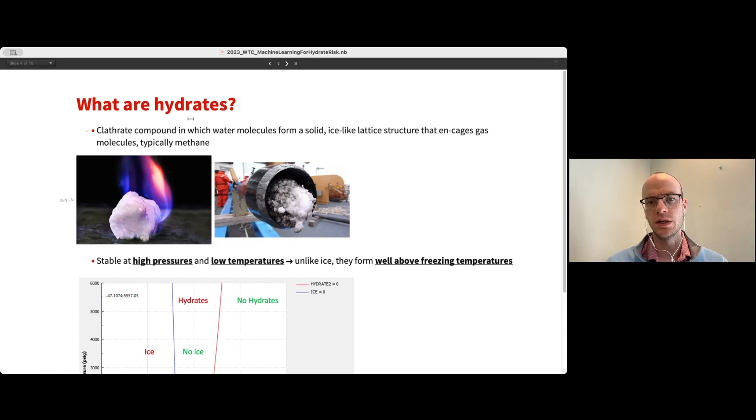I've got an example here on the right. You can form these hydrates in your pipeline, and if you have the right conditions and enough of the mass required, the water and the gas, those hydrates will continue to agglomerate together, and they'll basically lead to a blockage of the pipeline. In an isolated pipeline subsea, that's an incredibly problematic situation. I wanted to give this background about hydrates because it's going to feed into what we were doing on this particular project.

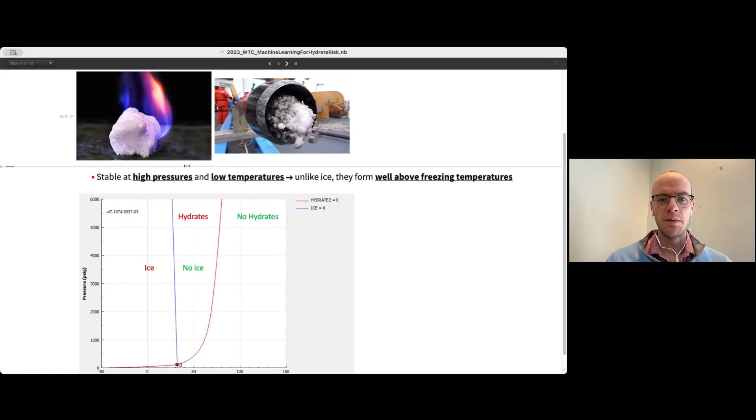So a little bit more about hydrates and why they're interesting. Obviously they look like ice, they feel like ice as you're looking at them. But you can see here, I've plotted a temperature versus pressure plot. The blue line here is actually ice.

So water ice forms at 32 degrees. As you increase the pressure, there's a small deviation where you can actually go a little bit lower before you start to form ice. So kind of to the left of this line is ice, to the right is no ice, right? Now, the hydrate curve is actually this red line here, right?

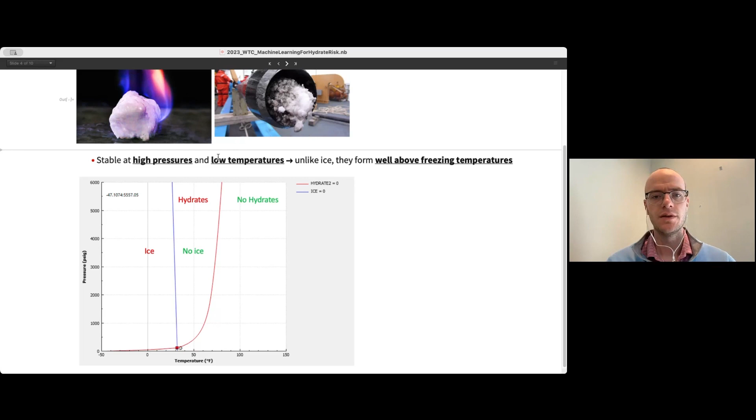And what you can see is that you can form a hydrate at temperatures well above freezing, and actually at temperatures that are relatively moderate, somewhere around 60 to 70 degrees if you have the pressure, right? So there's a strong pressure component, and that's what ultimately allows hydrates to form in situations that you wouldn't necessarily intuitively expect a hydrate to form if you thought about it like ice. So that's some background about hydrates.

What I wanted to focus on now is actually the project that we were involved in. So this was not an offshore project. It was actually an onshore LNG facility. And so LNG stands for liquefied natural gas. I'm sure most people have heard of this. You probably see it on the news occasionally, things like that.

It's essentially you're taking methane, right, which is a gas, and you're converting it into a liquid form so that you can transport it easier, right? So we've heard of exporting LNG. That is essentially where you're taking this methane, you're converting it into a liquid form, and then you're able to ship it on these large tankers around the world. And it's one of the most effective ways to transport gas.

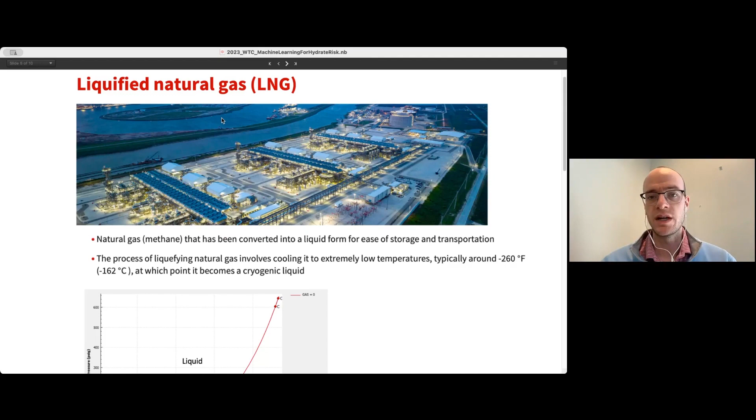The process of actually creating LNG is rather difficult, though. Methane by itself does not want to be a liquid, right? Really at any temperature that we're used to, right? So this again is that same plot I was showing earlier, temperature versus pressure, but this is the phase envelope for pure methane, right?

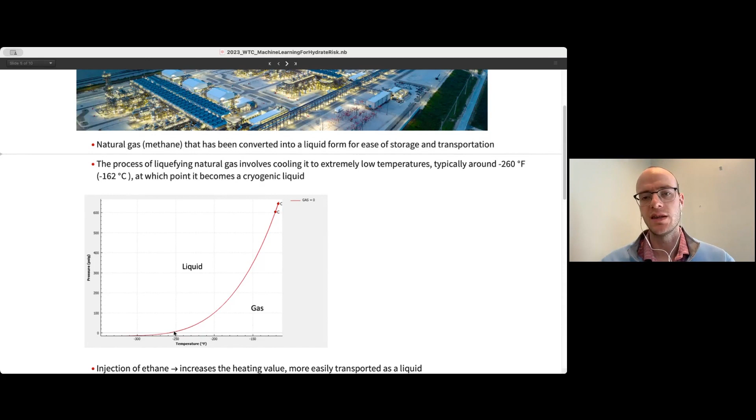So basically at temperatures above around minus 300 degrees Fahrenheit, that methane is going to want to exist as a gas. So the only way you can get it to a liquid is to actually cool it down to these temperatures. So you typically see LNG plants operating at around minus 260 degrees Fahrenheit. That's the only way that they can get that methane into a liquid form.

Now, one of the other things that occasionally these plants will do is they will also include an ethane stream in there, right? So methane is a single carbon molecule, so carbon and four hydrogens. Ethane is two carbons and six hydrogens. And so what you end up with when you do that is you can increase the heating value of that methane that you're shipping.

And all of the LNG prices are generally based on how much heating value you actually have. So if you have ethane available as a source, you can inject that into the methane, then do your cryogenic processes, and you actually increase the heating value of that LNG.

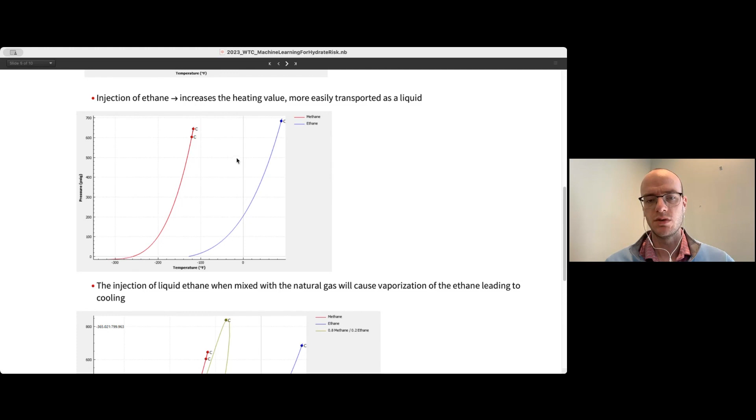So here I've got that same methane phase envelope, and here I've got the ethane phase envelope, right? And you can see ethane is much more likely to form a liquid. Over here it will be a gas, but at relatively reasonable temperatures, you can convert ethane into a liquid much easier than you can with methane.

So now, when you inject that ethane, which in the case of this project was coming in as a liquid stream because it was at a higher pressure and slightly cooler temperature, now you have a methane and ethane stream, and you actually have a multi-component system, right? And so the phase behavior of that system is fundamentally different from when you have either methane or ethane alone.

You can see here, this is a representative phase envelope for what an 80-20 mixture of methane-ethane looks like. So you can see that we're shifted to the right compared to methane, and shifted to the left compared to ethane. And we also have this envelope, right? And what that means is that in between these two bands, we'll actually have a multi-phase region, where we'll have a liquid and a gas phase present at the same time.

The important thing, though, is that when you're injecting that ethane, you're injecting it in a liquid state, and when it mixes with that methane, there's a vaporization process that's going to happen to that ethane.

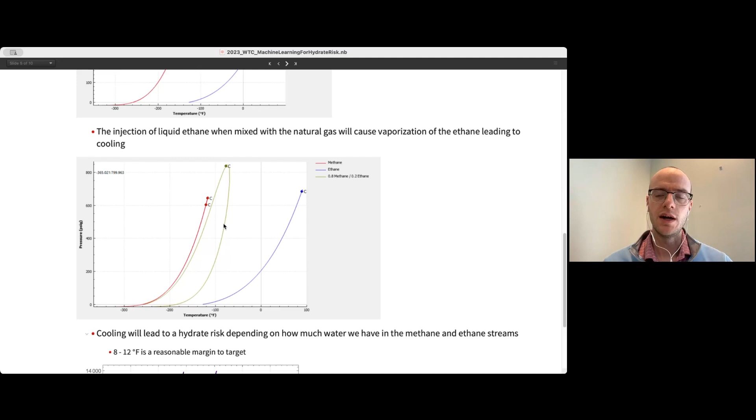And through that vaporization process, the ethane will cool, right? And sometimes that cooling could be quite substantial. And so, tying this back to what I was talking about earlier, if that cooling is substantial enough and you actually have some moisture content in either the ethane or the methane stream that you're mixing, you suddenly have a risk for forming hydrates. So same idea that I was talking about before.

Now in this case, these streams that we're mixing when you're going into an LNG facility generally are very pure. They've already gone through some kind of processing, or some kind of separation of different components within their streams. However, there's still a strong chance that you'll end up with enough water content in those streams to actually form hydrate. Generally, when you're looking at forming hydrates, you're in a situation where you have excess water. So water is not a limiting component to the hydrate formation.

However, in this case, because we are at such low water contents, the conditions that you'll form hydrates at are actually limited by how much water you can form. And some of the theory and some of the calculations that have been testing that are out there show that there's a bit of uncertainty at these kind of conditions.

So for example, I've plotted here. You can see, moving from the right to the left, how that hydrate curve that I was showing originally changes. On the far right, you're saturated with water. You have enough water that you're not limited in the hydrate formation on water. And as you move down to smaller and smaller amounts of water, you can see that curve starts to shift to the left.

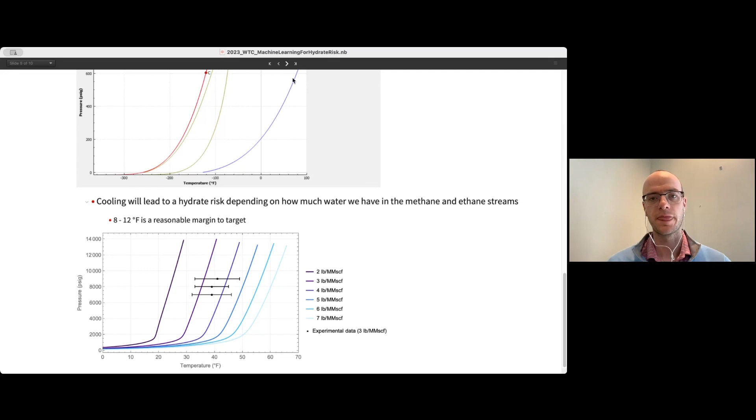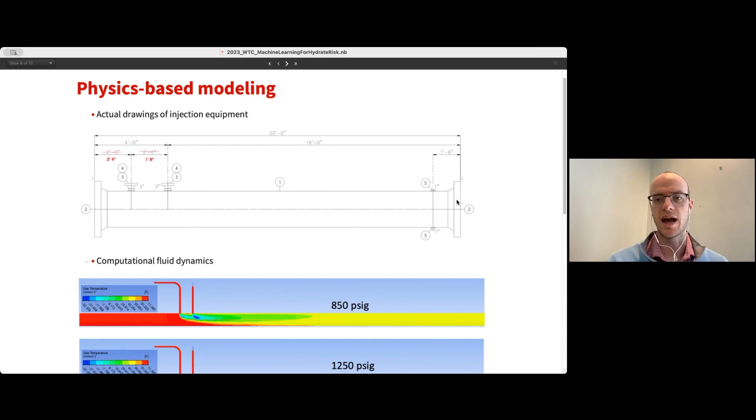The mixing happens, and by the end of this, you've got a homogeneous gas phase of your original natural gas with that vaporized ethane. As part of the project, there were some really interesting computational fluid dynamic simulations that were run to understand this process in detail. So what I'm showing here is you've got your natural gas coming in at around 71 degrees Fahrenheit. These ethane streams are also coming in around 70 degrees Fahrenheit.

Now that mixing happens, and it happens relatively quickly, but during that initial vaporization, you can see that you get some ethane coming in here, and you get temperatures dropping to around minus 32 degrees or so. Now, only around 5 to 10 feet down that line, you can see that the full mixing has occurred, and you're back up to temperatures around 40 degrees Fahrenheit or so. So there is a strong risk of what might be happening here when you're forming those incredibly cold temperatures for a brief period of time.

And the key thing that we wanted to analyze and look at is, are you forming those cold temperatures as close to the center of the pipe as possible? Because if you're forming those on the outer walls of the pipeline, you're giving a spot for hydrate agglomeration to occur. And if you're doing this with mass volumes that are being injected into this pipe, you're just continually feeding that hydrate formation, and it wouldn't take long before the agglomeration process would become large enough that you could cause a blockage in this, right?

So the thing we wanted to make sure is that this process, you're going to hit these low temperatures, but it's going to occur as close to the middle of the pipe as you can, and then very quickly we start to see all that phase mixing, and you end up with a much warmer process, right?

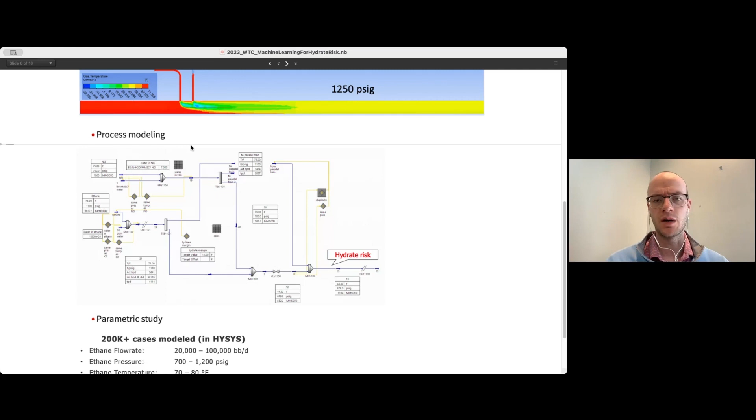And the speed here of how we can model with this is orders of magnitude faster than what we can do with computational fluid dynamics. And so this gives us the ability to basically change inputs, right? Change all the inputs that we care about in the model. So that's the temperatures and the pressures and the flow rates of both the ethane streams and the methane streams, the compositions, the water contents, things like that.

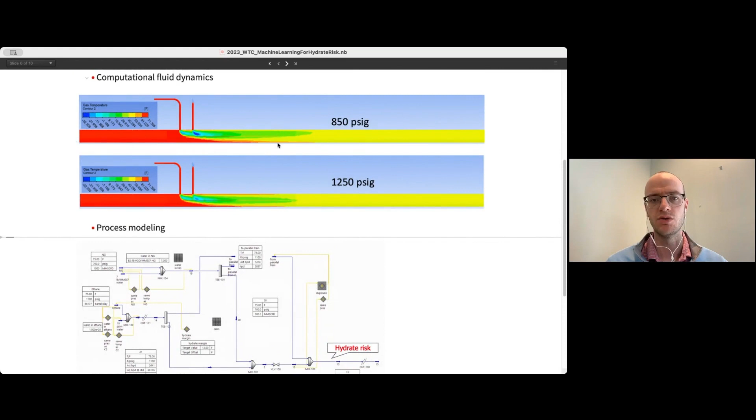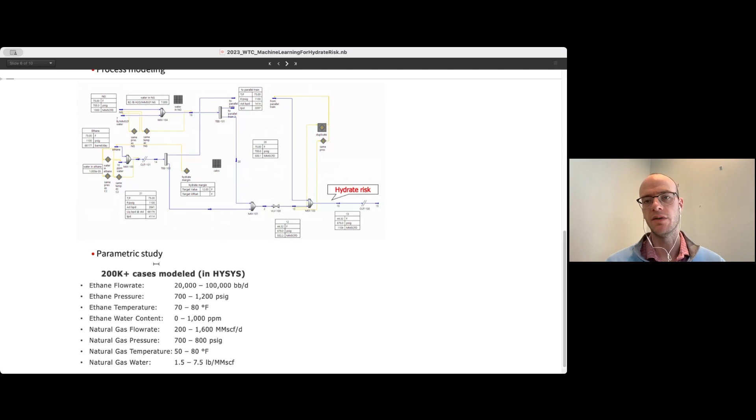And then ultimately what we wanted to do was to monitor for this hydrate risk after all this mixing has occurred, knowing that this process model that we've set up here has been validated by the more computationally heavy approach up here. So all in all, we ended up with a HYSYS model that was capable of simulating 200,000 cases, right? And we set this up in a parametric study, like I said, varying all the possible inputs that we care about that could change within the system.

So, kind of just recapping where we are at, right? So we've defined the risk for the project. There is a risk of hydrates that we want to completely avoid. We don't want that risk to be present while we're operating. We defined what the ideal margin was that we need to stay above. Again, from some of that lab testing, we know that there's an uncertainty around 8 to 12 degrees Fahrenheit.

So if our prediction was as best as it could be, we could still expect that there's 8 to 12 degrees of uncertainty. So we want to operate around whatever our prediction is, essentially plus 8 to 12 degrees of margin of uncertainty to ensure that we do stay outside of that risk for hydrates.

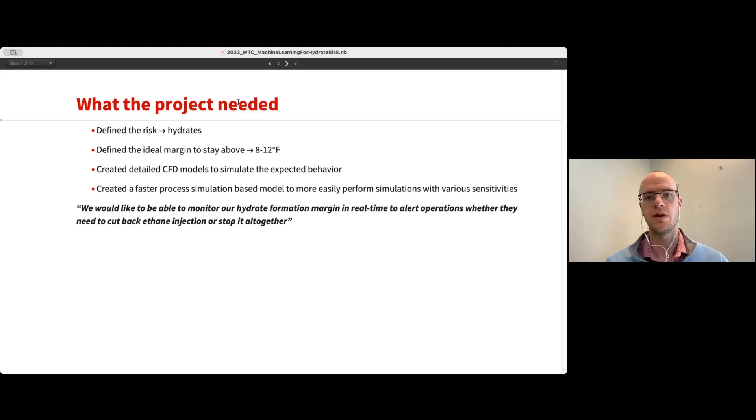There was detailed CFD modeling done to simulate this process in detail. And once we understood that, we could then build a faster process simulation model that was ensured to be aligned with what we'd done on the computational fluid dynamics approach, right? And so at this point, the client said, what we would like to be able to monitor is our hydrate formation margin in real time to alert operations whether they need to cut the ethane injection or stop it altogether, right? So I'm getting to now the part where Mathematica and Wolfram Language actually came in.

So we ran this large parametric study in HYSYS. Again, we have over 200,000 data points of all the possible ways that this system could behave. And we were tasked with how do you build a model that can be implemented into a real-time system to predict that hydrate formation temperature for the client. So the first thing we did with the Wolfram Language was we put all this data in and we used some of the Predict functions, right?

And what that did is it gives us a really easy starting point to say, okay, what kind of accuracy can we achieve with relatively simple models, like something like a linear regression, and then increasing in complexity to something like a neural network, and then ultimately, because this is a parametric model run from a simulation, we controlled the inputs. So we have essentially squared-off arrays of inputs that we're putting into this, so you can actually use multilinear interpolation here, right?

And that actually ends up being the most accurate way that you can model this. But the problem there is if you want to embed something like that into a relatively simple automation control system, you're talking about being able to take all 200,000 of those points and put them into the model, right?

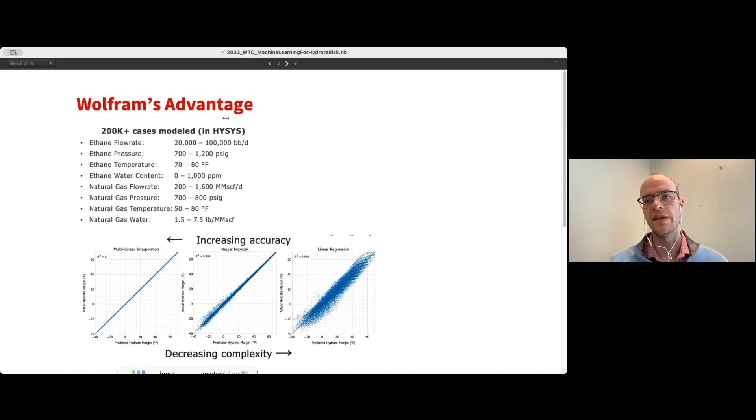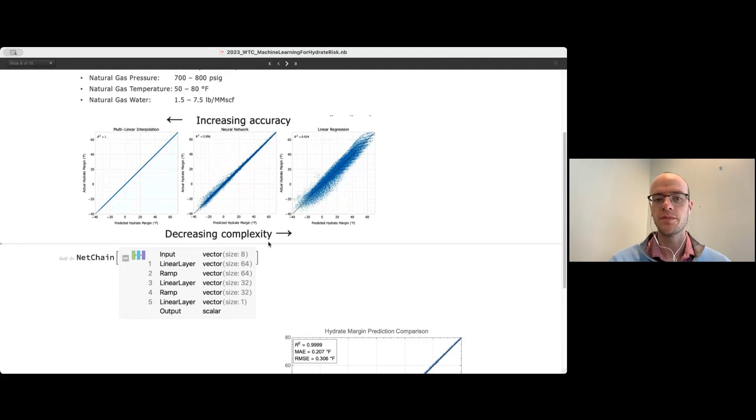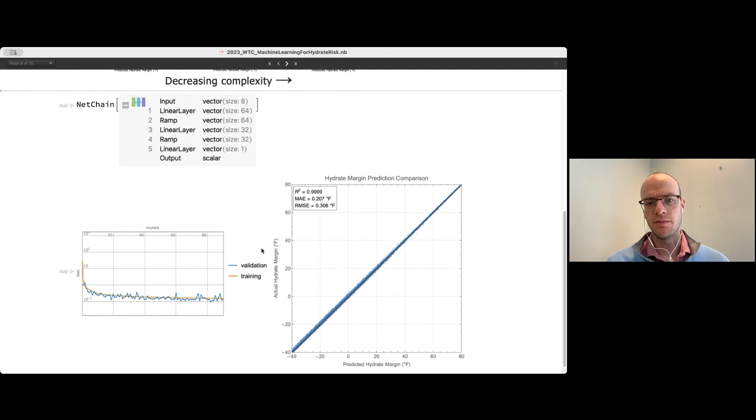So again, we used the Wolfram Language, building a relatively simple neural network with 3 different linear layers and some ramp functions for the activations. We were able to achieve basically the following results down here, right? So this is a parity plot showing how our predictions for the hydrate margin with this neural network compared to the actual predictions from the HYSYS model.

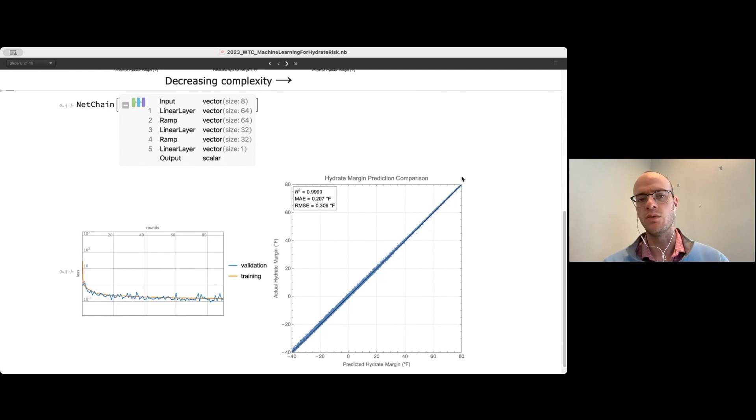Our overall mean absolute error was around 0.207, and the root mean squared error was 0.306, right? So very good performance, probably within what we would want for this type of model to be deployed into the field. And so with that, we kind of set out to do that.

So we said, how can we most easily put this neural network into practice in the field, right? We don't have the ability to call web APIs and things like that, so we can't deploy this model into the cloud. So here again, what we were able to use is some of the NetExtract functions in the Wolfram Language to pull out those weights, the biases, and things like that. And then we could actually construct the matrix multiplication operations that the neural network was doing. And we worked with the automation control to get all of that math programmed into the automation control.

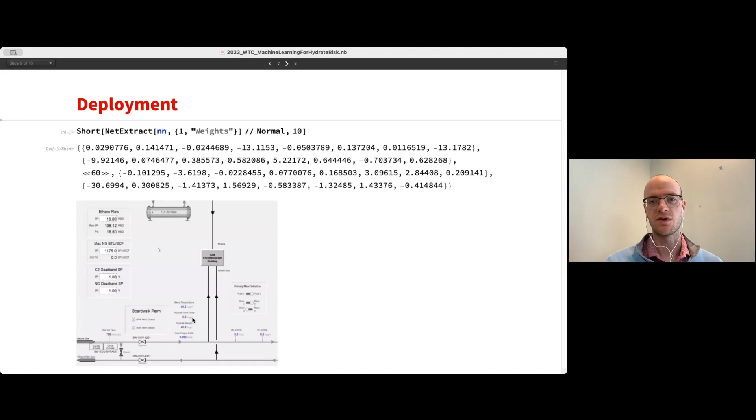So got a little screenshot here, but you can see this is the real life system, right? It's receiving its data in real time and all that. And then right down here, we've actually got our model kind of running in the background, telling them what the hydrate formation temperature is and what the hydrate margin is. You can see here, it's around 48 degrees, so kind of well outside of where we would want to be during steady state for some kind of hydrate monitoring risk.

So, yeah, just recapping, right? So kind of where Wolfram Language played a role, right? We actually analyzed years' worth of historical data. I didn't get a chance to talk about that, just time and things like that. But it was a big component of understanding the possible risk in this system. Once we had this process model, we knew what conditions were going to be problematic, and we looked at historically, do we ever kind of reach some of those conditions? And it turns out that we do. Not that often, but it certainly was a risk for the facility and something to be planned for.

The Wolfram Language also allowed us to use very easy screening of different models to give us a place to start with before just diving into something more specific. Then the neural network framework within the language is very easy to use. It's very flexible. It's a lot easier than some of the more traditional languages out there when you're trying to build these neural networks. It also gives us the ability to kind of write scripts, right? So I mentioned one of the neural networks that we built for this project. There were actually two more, and I didn't want to spend too much time on them, but we were able to build those in a very automated fashion using just normal code that's in the Wolfram Language.

And then lastly, the symbolic architecture of the language, right? It makes it so much easier to pull out the information that you want from those different layers that you've trained. Things like that. It's all things that can be done in other languages, right? But it's the consistency and the cohesiveness that's in the Wolfram Language that allows it to be this kind of one-stop shop for executing a project like this and seeing it from start to finish.